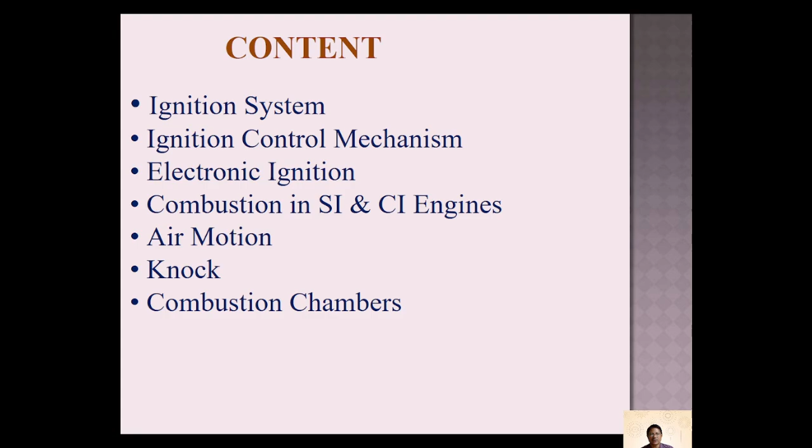So, the content of today's presentation is ignition system, ignition control mechanism, electronic ignition, combustion in SI and CI engines, air motion, knock, and combustion chambers. So in the ignition system, we can introduce this system to generate a high voltage spark to ignite the air fuel mixture in SI engines. So to trigger, the spark is required. That spark will initiate the fire. That fire will ignite the combustion. That combustion will produce the heat energy. That heat energy will be used to power the engine.

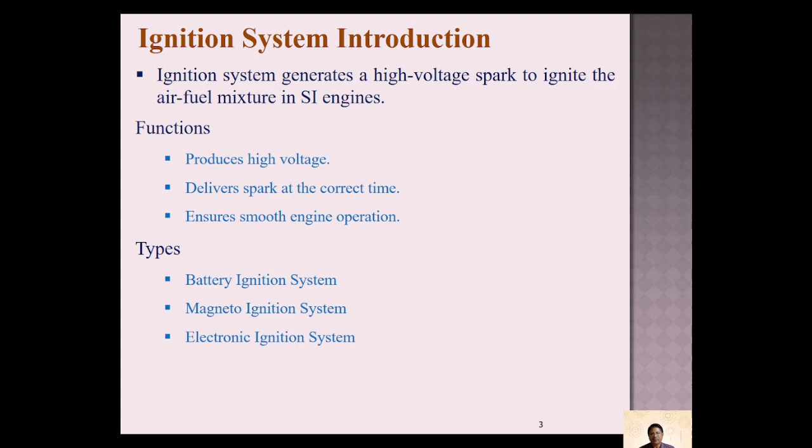So this ignition system functions to produce high voltage, then deliver the spark at the correct time to ensure smooth engine operation. So timing must be maintained. If timing is maintained and a sufficient spark is produced, that ensures the smooth function of the engine. This can be further classified into battery ignition system and magneto ignition system. Then the electronic ignition system is a sophisticated system which most vehicles have nowadays.

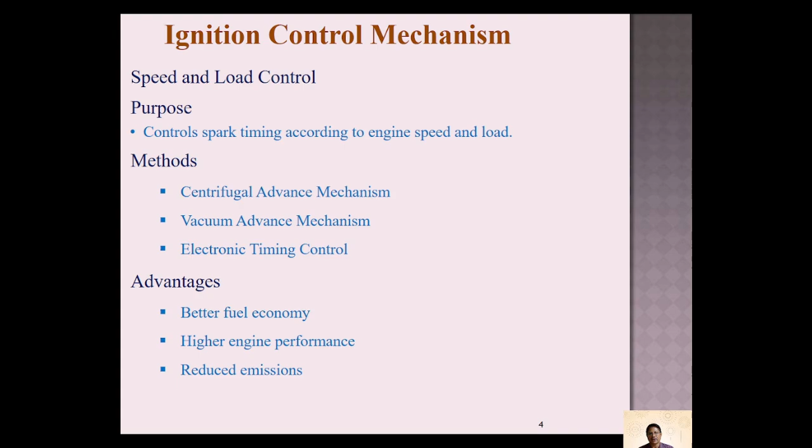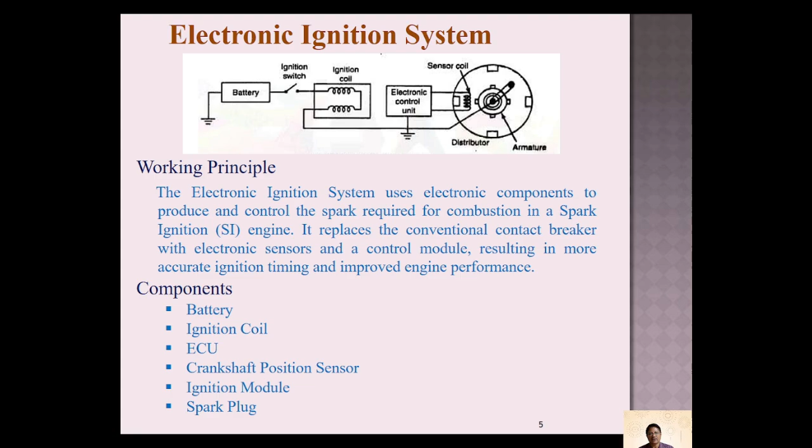So the electronic ignition system consists of battery, ignition switch, ignition coil, electronic control unit, that is ECU, then sensor coil, distributor, and armature. The working principle of this electronic ignition system, that is EIS, is to produce and control the spark required for combustion in a spark ignition engine. It replaces the conventional contact breaker with electronic sensors and a control module, resulting in more accurate ignition timing and improved engine performance. You can refer to the figure for this functioning. Components of this system: battery, ignition coil, electronic control unit, crankshaft position sensor, then ignition module and spark plug.

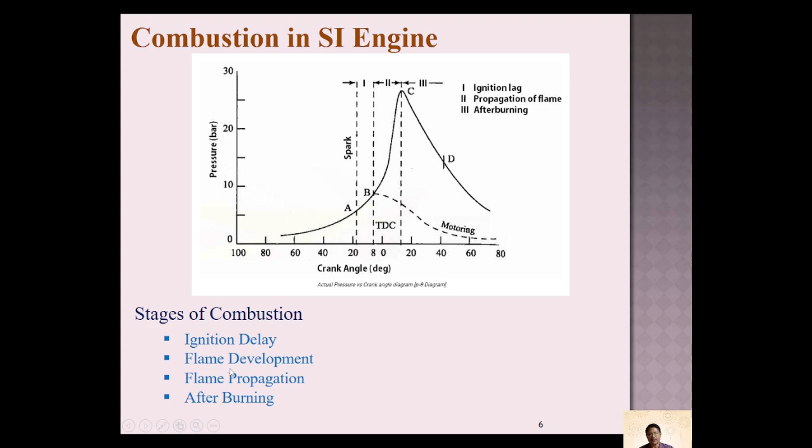So you can see from this figure, this graph starts from atmospheric pressure, increasing the pressure to about 27 bar. That is the peak pressure while full combustion takes place. From point C to D, the expansion will take place and the pressure will drop. So this is how combustion in an SI engine takes place. So four stages can be seen: one is ignition delay, another one is flame development, third one is flame propagation, then fourth one is after burning.

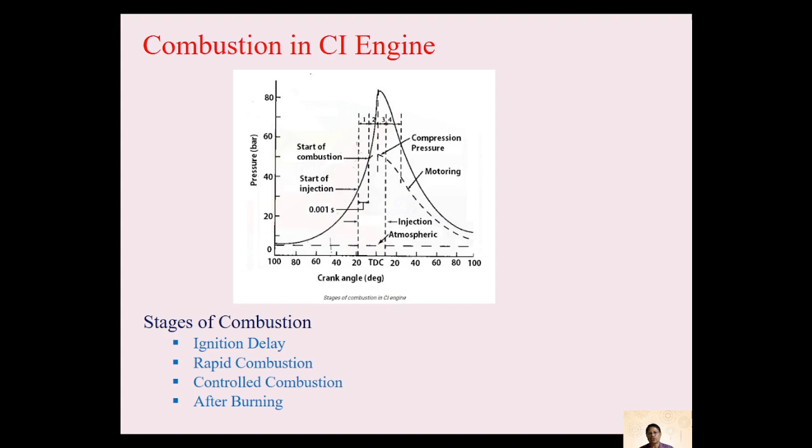Similarly, combustion in the compression ignition engine, CI engine, which is the diesel engine, will take place. The pressure will be higher. If you see, this pressure moves from atmospheric to around 85 bar. This pattern is similar to the petrol engine, that is the spark ignition engine. So this also can be classified into 4 stages: first one is ignition delay, second one is rapid combustion, third one is controlled combustion, fourth one is after burning. These 4 stages are given at the bottom. So the start of injection is here, the start of combustion is here, and then the peak pressure build-up. All the air fuel mixture inside the cylinder will be burned, so maximum pressure will be there. After that the expansion will take place, so the pressure will gradually reduce.

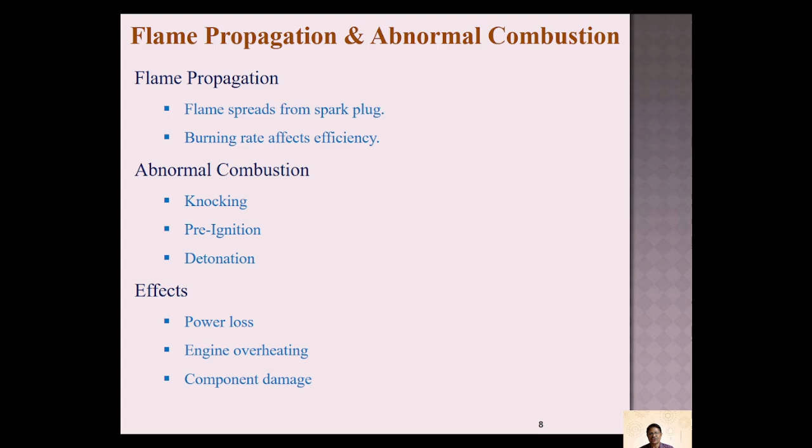So flame propagation and abnormal combustion. Flame propagation is, once the spark plug sparks the ignition, the flame will spread over the cylinder top side. So burning rate affects efficiency. In abnormal combustion, it will not be a smooth combustion. If some unburned fuel is there, then it will produce knocking, as well as ignition prior to the spark, that is pre-ignition, then detonation. Afterwards, some unburned fuel will produce knock, so that is detonation. It causes power loss, engine overheating, then component damage. The flame propagation must be very smooth and normal. If abnormal combustion takes place, power loss, engine overheating, and component damage will occur.

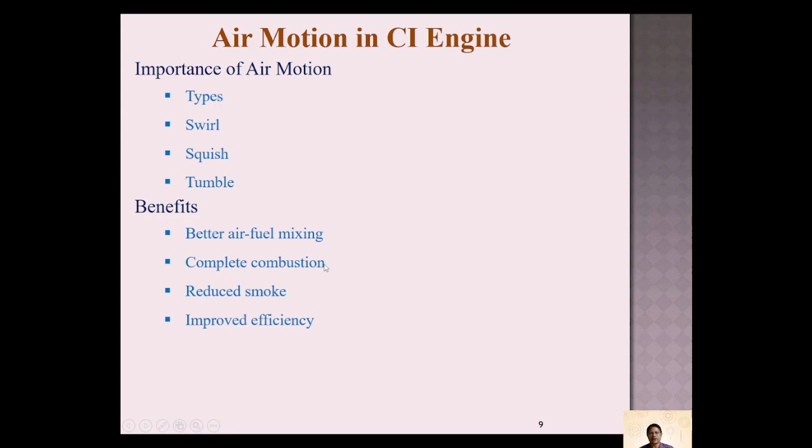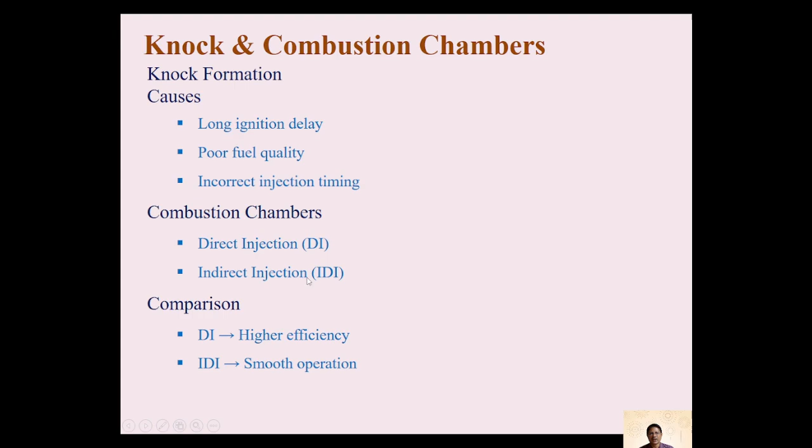Then air motion in CI engines. Important air motion types: swirl, squish, tumble, all these are required. Benefits: better air fuel mixing, complete combustion, reduced smoke, and improved efficiency. So knock and combustion chambers. The causes of knock formation are long ignition delay, poor fuel quality, and incorrect injection timing. Combustion chambers can be classified into 2 categories: one is direct injection, DI, another one is indirect injection, IDI. In comparison, DI is for higher efficiency, IDI for smooth operation.

So after seeing this, we can conclude: the ignition system provides the correct spark at the right time, ensuring efficient combustion and smooth engine operation. Proper combustion in SI and CI engines improves engine performance and fuel economy, and reduces exhaust emissions. Air motion, combustion chamber design, and ignition timing play a vital role in achieving complete and efficient combustion. Modern electronic ignition systems and advanced combustion technologies enhance engine efficiency, reliability, and environmental performance. This is how we are concluding today.